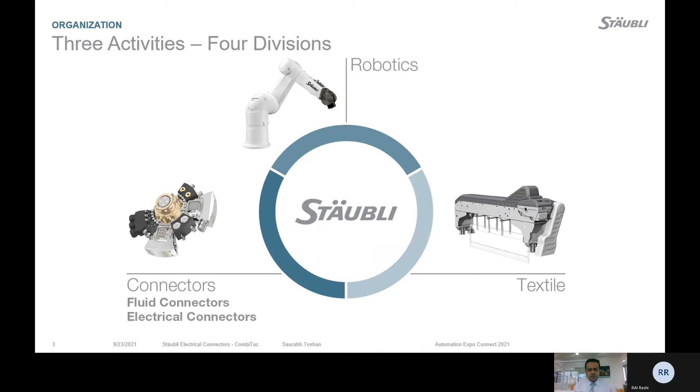So first of all, about Stäubli Group, we are a mechatronic solution provider. We have a wide range of product lines in different industries. Stäubli was founded in 1892, and it is a family-owned organization. We have four divisions in Stäubli: robotics, textile, and connectors. In connectors, we have two divisions: fluid connectors and electrical connectors.

Global presence: Stäubli is a global group. We have 29 business units in different countries. We have more than 600 R&D specialists. We have 14 production units. We are catering to more than 20 different industry segments. And of course, we have more than 2100 patented products.

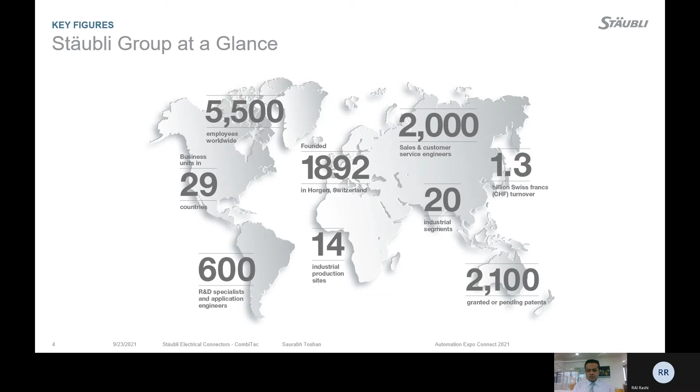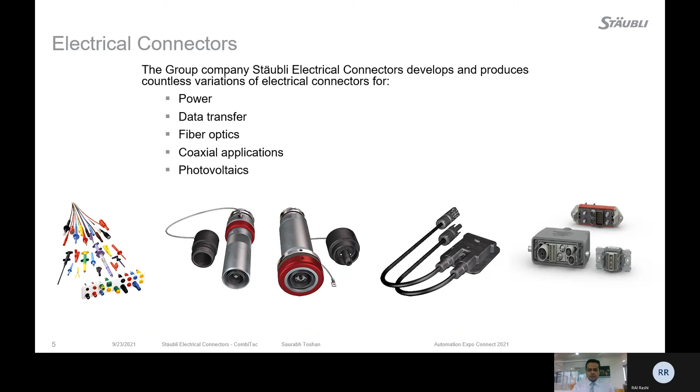So in electrical connectors, we are into solutions for the needs of especially the electrical market. We have connectors for power, data transfer, fiber optics, coaxial applications, and photovoltaic. As far as markets are concerned, we are catering to almost all the markets of the industry: aeronautics, alternative fuels, automotive, chemical, machinery, steel, nuclear, motorsports, railway, power industry, renewable energy.

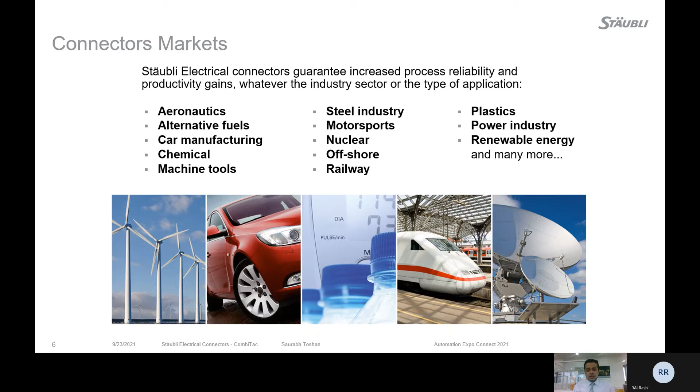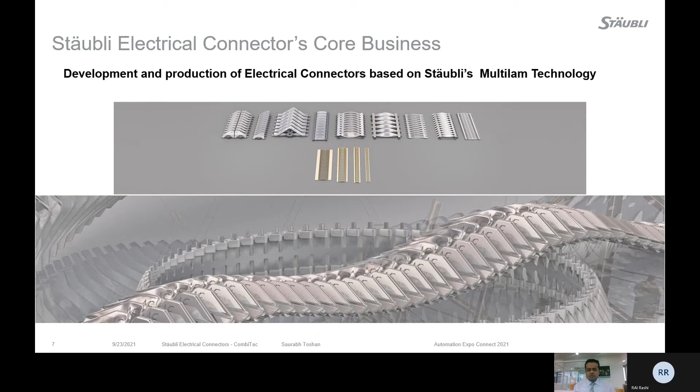So in our connectors, we have our core technology, which is called Multilam. Multilam is an electrical contact which we use inside our connector, which makes sure that there is a minimum contact resistance and you have a long lasting durable connector with high mating cycles, which gives you efficient flow of current. So in the next slide, we will see the advantages of using this Multilam, or you can say electrical contact, inside our connectors.

It provides you high current carrying capacity. As I told, minimum power losses, minimum contact resistance. If the contact resistance is minimum, it makes sure that your contacts are durable. It will withstand a long time. It will help you to provide high operating temperatures, up to 350 degrees. It is usable in any environment: air, insulating oil, gas, or vacuum.

And of course, especially for railway or machinery applications where the vibrations are very high, we provide high resistance to vibration. And we use it in round, flat, and spherical types. And it is very good for corrosion resistance also. So our core technology is that we use that electrical contact in every connector.

So now, as this presentation and this session is about Industry 4.0, first I will show you how we are helping different industries with our solutions which are catering to 4.0, and then I will talk about it in detail. So let me show you a video about it.

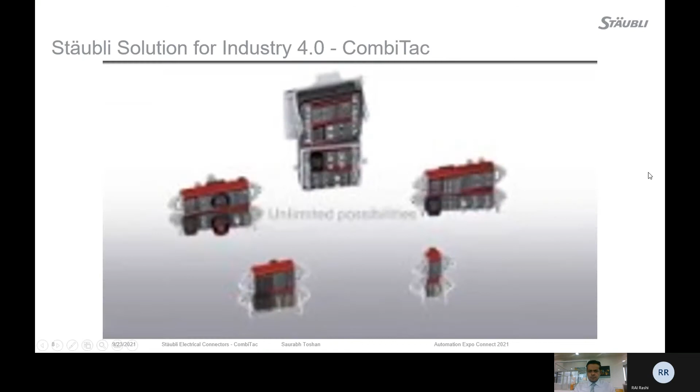So that was a video which showed you the connector which is used in machinery, railways, automotive, and unlimited applications were shown in the video. But especially when you want to move your system towards automation, our connectors are helping. So in later slides, I will show you a video where you will see that automatic operation is happening with the help of our connector.

So again, adding to the needs of Industry 4.0, we have two different modules which are part of CombiTac: data, Ethernet, and data, video, audio, and RF. These are the modules being used by customers with data and Ethernet. For Ethernet, you can use Cat6, Cat6a, Profinet, Profibus, any kind of communication, we have contacts for them. And for RF also, with RG cables, RG59, RG58, we have contacts.

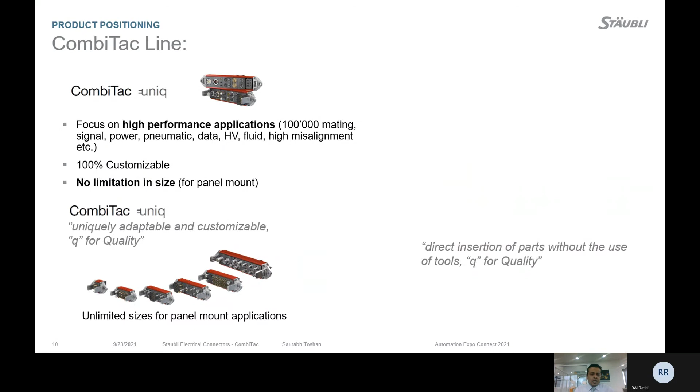So now, the connector, we call it CombiTac. In CombiTac, we have two product lines, CombiTac uniq and CombiTac direqt. CombiTac uniq is for high performance applications where the mating cycle needed by the application is more than 1 lakh. And CombiTac direqt is for middle to high performance applications where the mating cycle is 10,000. In CombiTac uniq, we have signal, power, pneumatic, fluid, data, all those contacts. And in CombiTac direqt, we have contacts of three different types: signal, power, and pneumatic.

So again, both the connectors are customized. They cater to almost all the needs of the industry. We have segregated them based on the performance or application demand. And if I talk about the difference between uniq and direqt: uniquely adapted and customizable, that's why we have this uniq, and q is for quality. For CombiTac direqt, direct insertion of parts without use of a tool. So the best part about direqt is you don't even need a tool to insert the contacts or the parts. And Q again stands for quality.

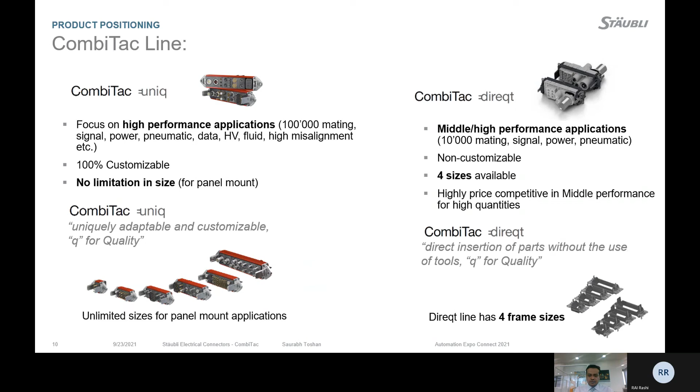So we will talk about the need for modular and customized solutions. Modular solutions are designed to combine various connection types in a single connector. A simple example: suppose in your application you are using 3 or 4 different types of connectors. One you are using for signal, another for power, and maybe one more for pneumatic or fluid contact. So we are providing you a connector which will combine your contacts, and it will help you save space, save cost, save time, and eliminate a lot of errors which can happen while the system is under process.

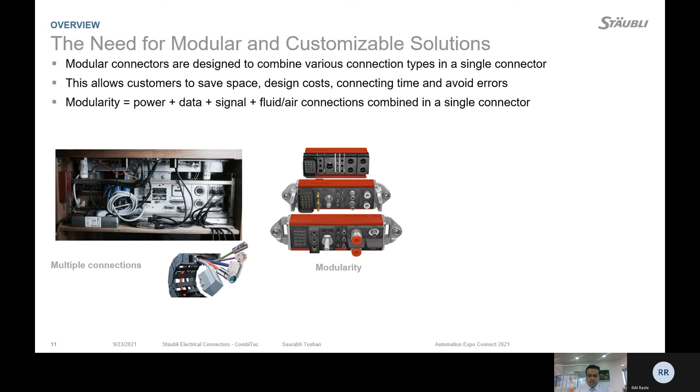And yes, it's a modular solution, you can customize it, like I told, power, data, signal, fluid, air combined in a single connector. You can see it here in the picture as well. All the contacts are there. And here you can see all the cables for pneumatic connection, fluid connection, and how it will look as an end product.

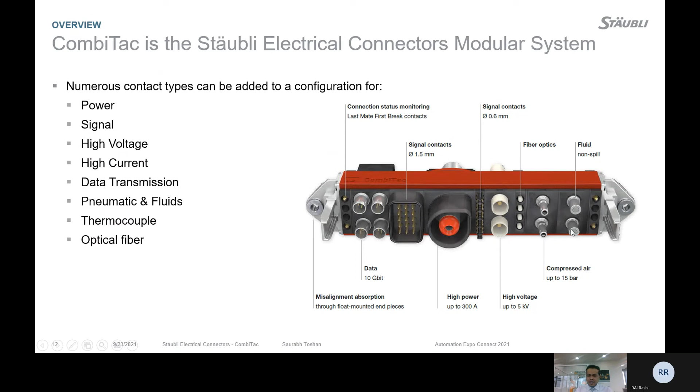Numerous contact types can be added to the configuration: power, signal, high voltage, high current, data transmission, pneumatic, fluid, thermocouple, and optical fiber. You can see in this configuration, every contact is added here.

Now, in different types of applications, you need different kinds of mounting. So we have panel mount and DIN housing as well. Panel mount is mostly used where you need automatic connection. You can mount it directly on the panel, and it will give you alignment, also misalignment compensation of plus minus 1 mm.

And again, it is for high mating cycle, up to 1 lakh, fast connection, automation, robotics. Yes, manual connection when CombiTac is built into sliding equipment, which can be battery swapping or any other application. DIN mounting, DIN housing, is mostly used when you need a manual connection, when you need safety against external elements like water, dust, or chemicals. It provides IP protection, so that's when you use DIN housings.

So if I talk about panel mounting CombiTac, as I said, high mating cycle automatic connection up to 1 lakh, end piece with float mounting feature for misalignment compensation. Here you can see plus minus 1 mm tolerance for the connector, which will make sure that if some misalignment is there in the system, the connector will take care of it.

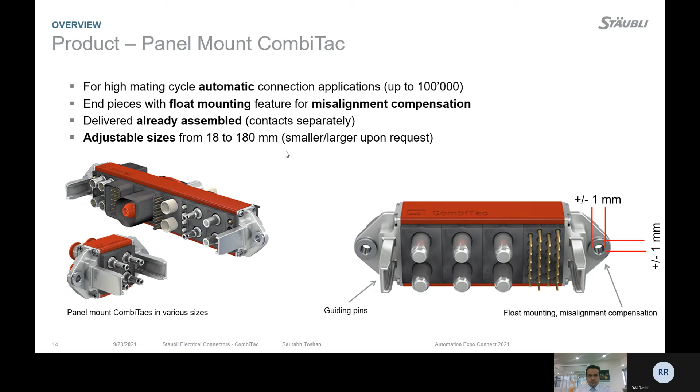So here, as you saw, we were providing only 1 mm tolerance for that particular connector. But if we talk about the product line, we have end pieces with tolerance up to plus minus 4 mm, which is a very big number. So in a nutshell, when you need any tolerance while making an AGV or any kind of blind mating application, you don't have to worry. Our connector with 4 mm maximum tolerance can take care of it, so you don't have to invest your cost and time in making sure that alignment is achieved.

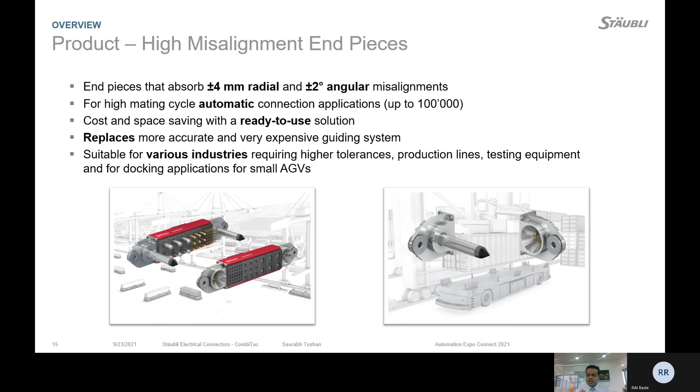So yes, cost and space saving with a ready to use solution. It replaces more accurate and very expensive guiding systems, and it provides cost benefit for various industries where high tolerance is needed, such as testing equipment and docking applications like AGVs.

In terms of housing, we have six different sizes in aluminum and four different sizes in plastic. We can deliver it pre-assembled, or separately if you want. As told previously, we have sizes from 18 to 180 mm, which is a very big range, and our housings come with IP protection, IP65 and IP68.

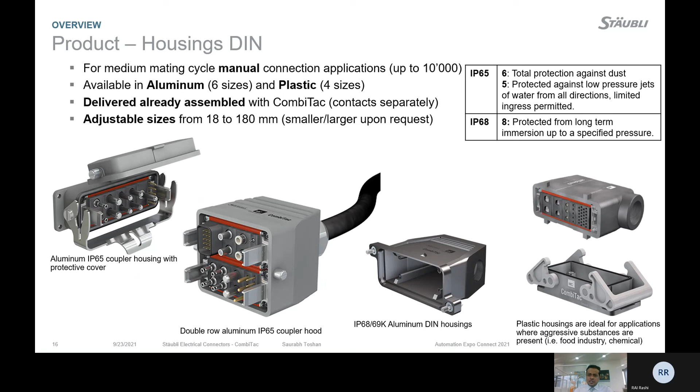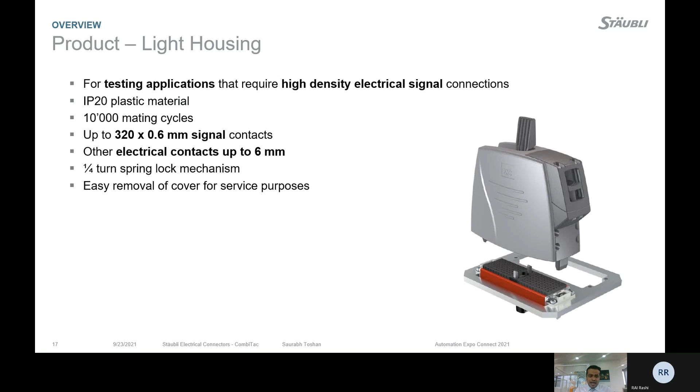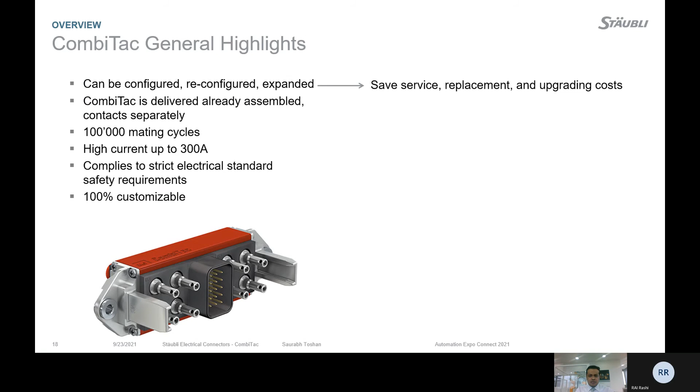Light housing, you can say, when we use plastic housing, it's light. So the general highlights: it can be configured and reconfigured. CombiTac is delivered already assembled to the customer, with high mating cycle, high current, and 100% customizable. These are some of the benefits I spoke about.

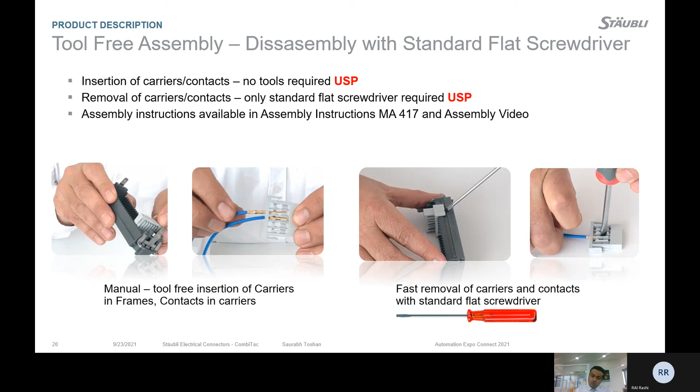This is the CombiTac direqt series. Again, the same contacts, but this one is up to 10,000 mating cycles, shock and vibration proof, and fire and smoke compliant, which is needed in railway applications. An important feature of CombiTac direqt is that it is tool free. Manual, tool free insertion of carrier in frame, contacts in carrier, and fast removal of carriers and contacts with standard flat screwdrivers.

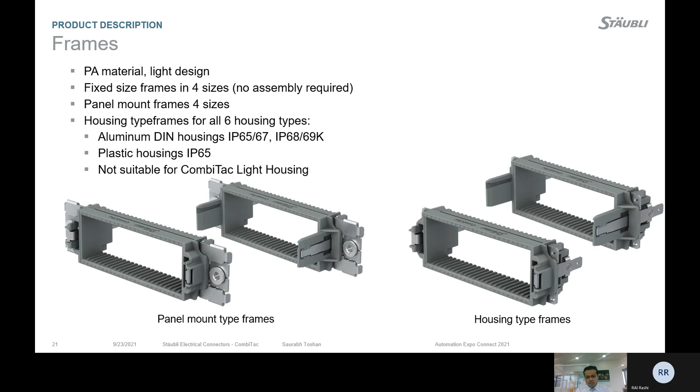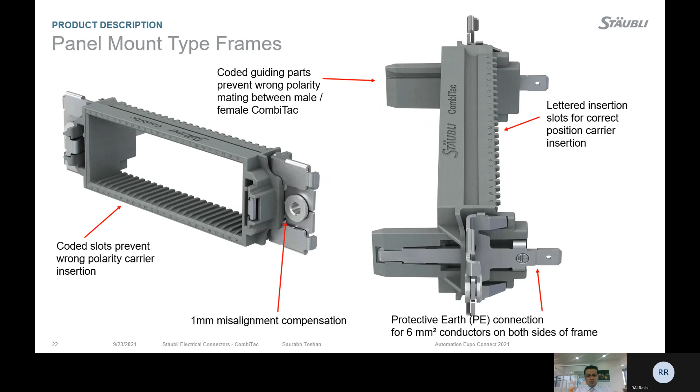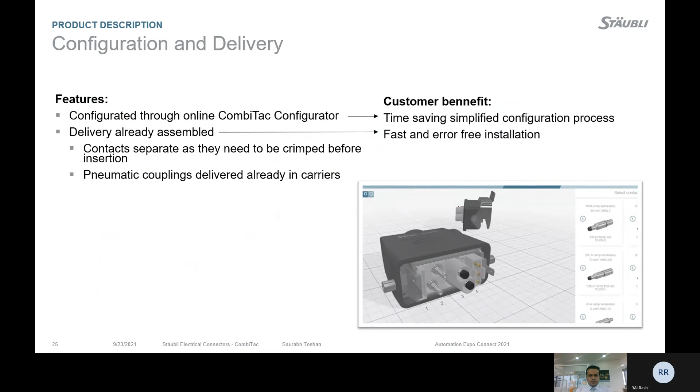So finally, I want to show a video of CombiTac, showing how it is helping to move your system towards Industry 4.0.

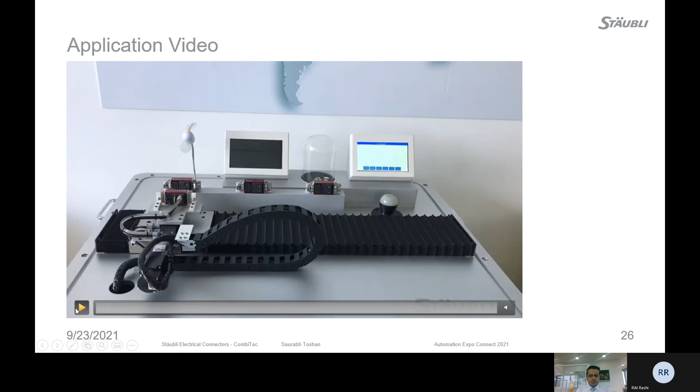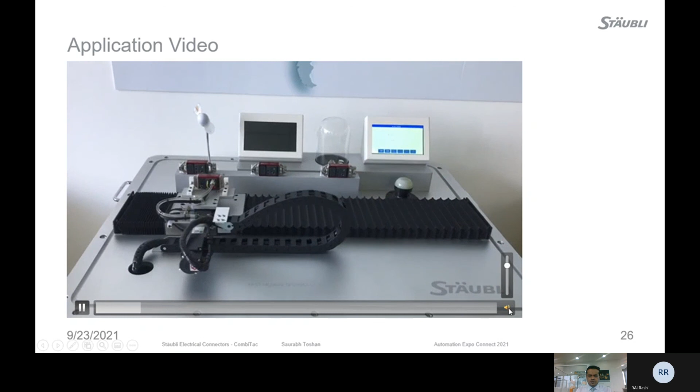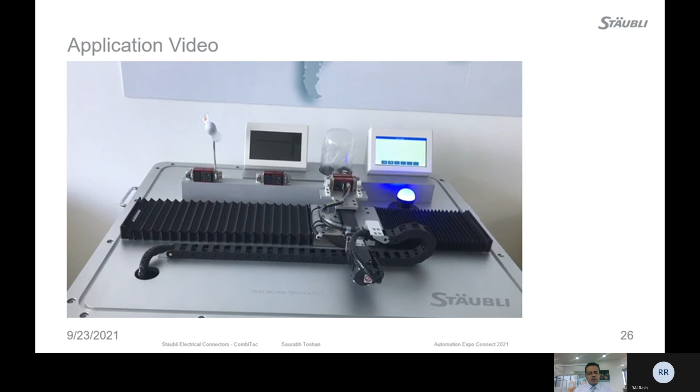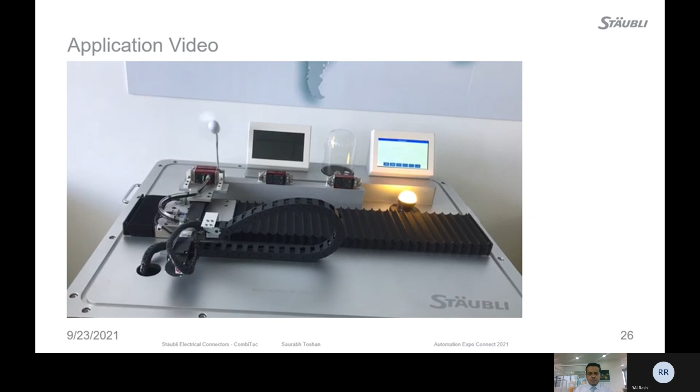Now it shows that electrical contacts are in place and are mating. You can see the screen is blinking because electrical contacts are made. Here it's a fluid contact, so when the connectors are in mating condition, you can see the water coming out. It's a small demo showing how it can make your system automatic. This is for pneumatic.

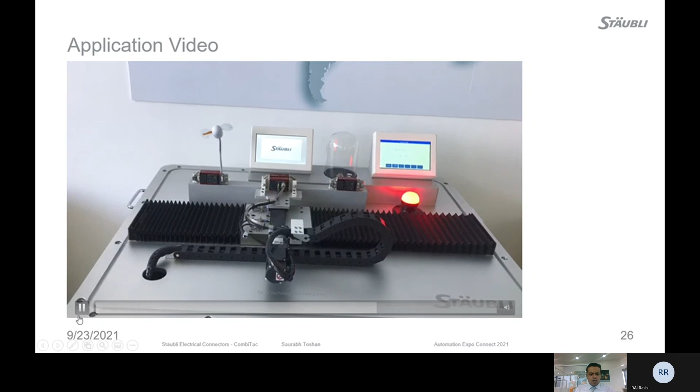So that was a small introduction of our connectors, which are helping to move your industry towards automation. Thank you very much everyone.